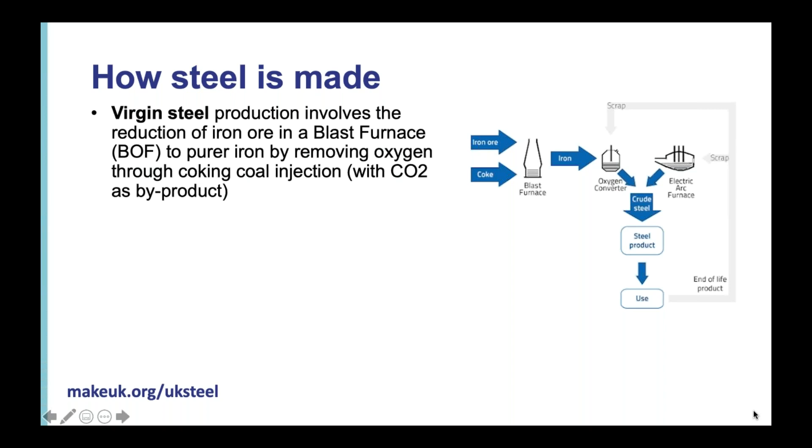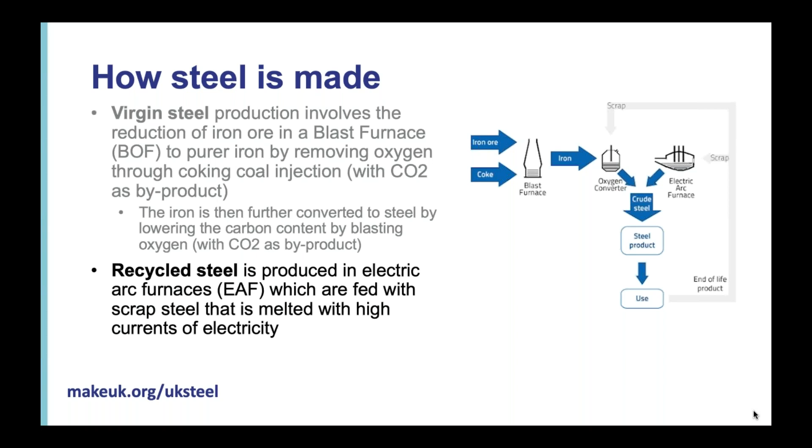The other way is through recycled steel. That is where you take scrap steel and you melt that with very high currents of electricity to produce a lower quality type of steel, but still steel production as such. On a global scale, about 70% of all steel that's produced is virgin steel, through the blast furnace process.

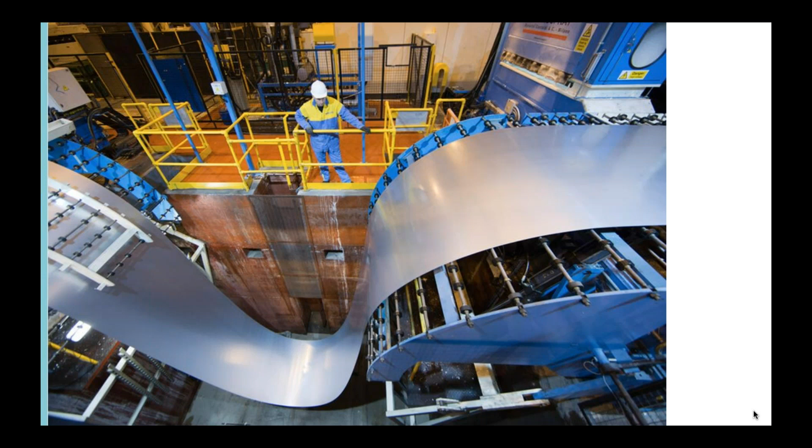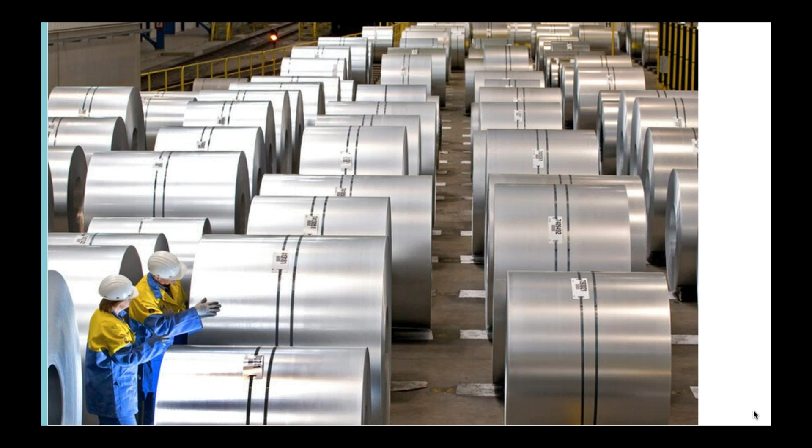I thought I'd just show you some quick pictures of what that looks like. This is first from a blast furnace site in the UK. Because they make high quality steel, they can make flat products such as the one we're seeing here. That goes into the auto industry, machinery, manufacturing and general domestic products and the like, and various high-end specialty type steels.

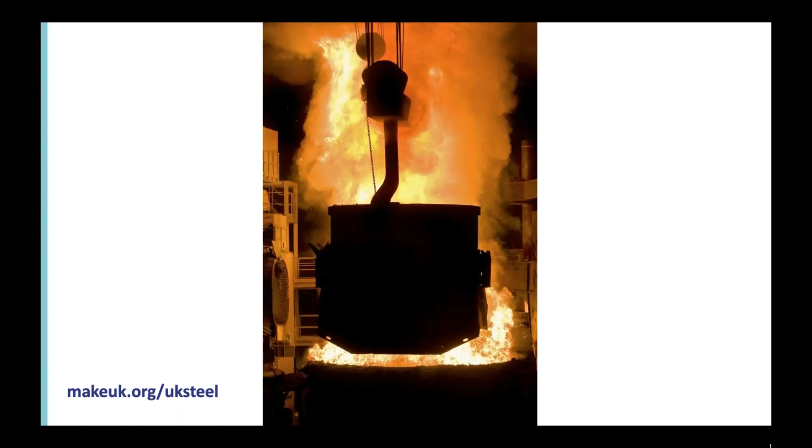The other type of steel I talked about was the electric arc furnace recycled steel, which is what you're seeing here, where scrap steel is poured in and then melted through very high electric currents. That produces what they call long products, either bars or wires, as seen here, usually used in construction or rebar as such.

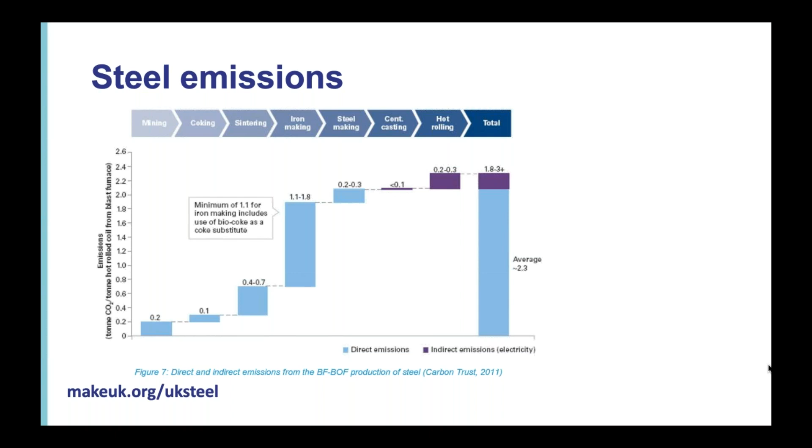Looking at the steel sector's emissions, the main emissions are from virgin steel making, where you have a lot of coal being used as a reductant. As you can see here, this illustrates where the emissions on average would come from on a virgin steel production site. And there you can see it's the iron making process. So it's about 2 tons of carbon per ton of steel that's being produced.

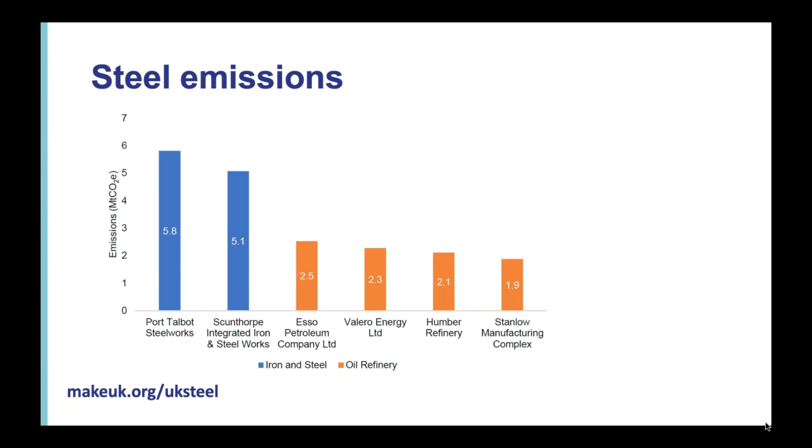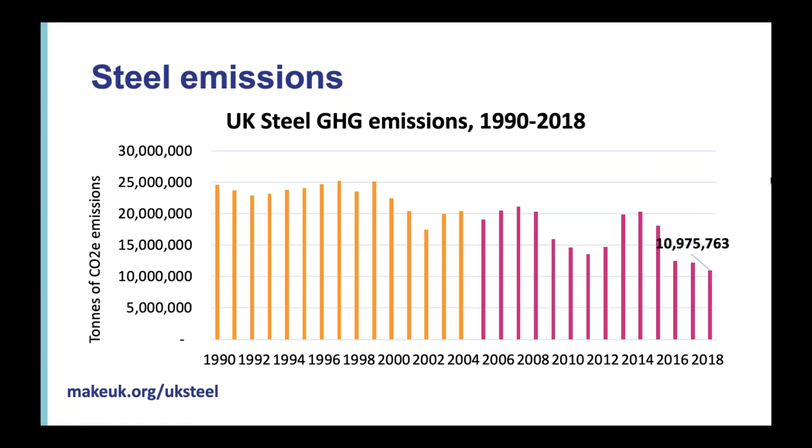We have reached a plateau in terms of how much efficiency you can gain now. As such, in the UK, we are directly responsible for almost 11 million tons of carbon last year. I also wanted to highlight some of the things that are particularly challenging for the steel sector compared to other sectors, which is that it's a very intensively traded product, very trade exposed, with globally speaking about 30 to 40% across national borders. In the UK, we import about 61% of our demand for steel and export again about half of our production as well. So again, very trade exposed.

So that means, when you look at the market for steel, we run very, very thin margins. Internationally speaking, there is intense competition, which has kept prices very low, but also margins very thin. That obviously means that any kind of additional cost you may face due to carbon pricing or various obligations from your national government is very difficult to pass on to your end consumer or your business consumer, whoever you sell your steel products to, because they are unable to. They can just choose someone else. They can buy their steel from Turkey, from Russia, Japan, and China, and so forth.

So it's very difficult to produce these low carbon steel products and sell them in the market when the product is like a commodity. Just one final point is also, as I said, at the moment there is no market really, or any niche market for green steel. From what we see, there's very few, if any, customers who are willing to pay any extra for upstream environmental qualities such as lower carbon or lower emission steels.

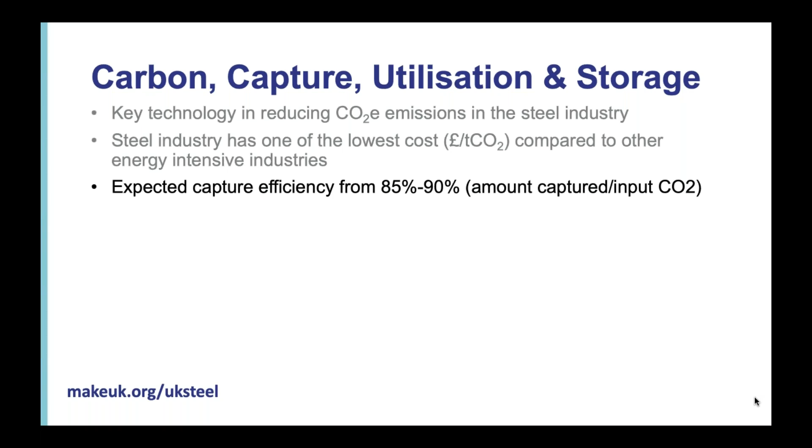At the moment, you operate with an assumption that you can capture about 85 to 90% of the site emissions. So there are some emissions you will not be able to capture with current CCUS technology. Looking at the cost, as I spoke before, it's quite low compared to other options, but you'd probably look at over £100 additional cost per ton of steel you produce, which for the cheapest type of steel would lead to a 30% increase in cost. That is quite significant when, being so trade exposed, a 30% increase in cost would make your product unsellable.

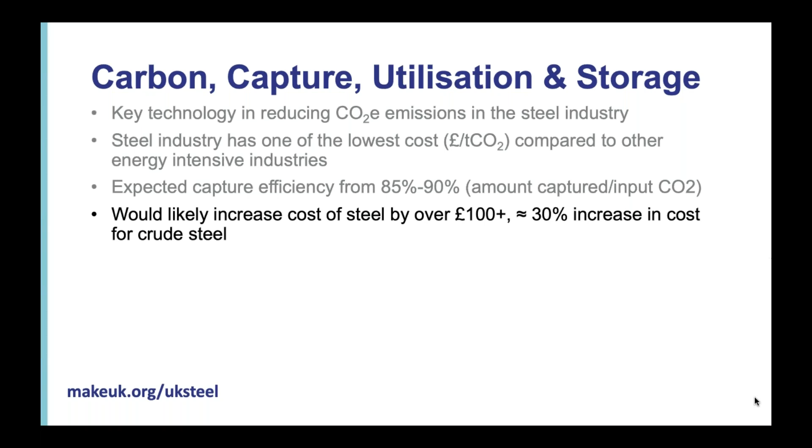I thought I'd just mention biomass very briefly, not because it is something that's actively being considered on a worldwide scale, but it is worth mentioning because there are some interesting things here. So here you're looking at replacing the coal in virgin steel making with a type of biochar.

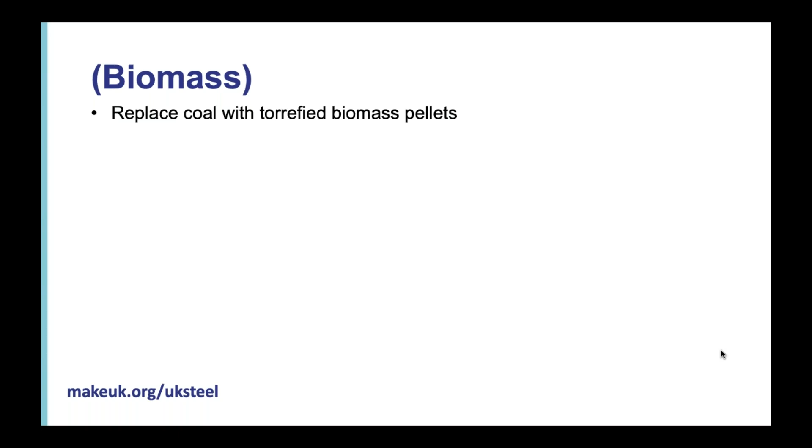It is quite an exciting option because, apart from obviously reducing carbon emissions, you also have the option, if you combine it with CCUS, of actually having negative emissions. So if part of your coal can be replaced with biomass, then there's the option, long-term wise, of going to negative emissions for the steel sector, which is desperately needed according to the UNFCCC.

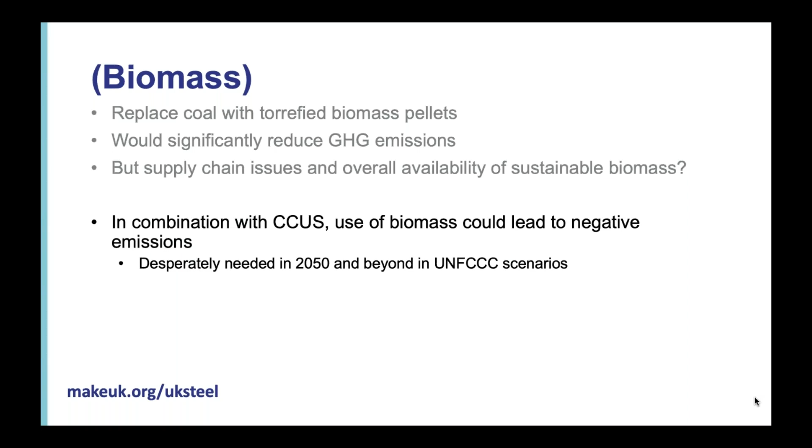But as I put it in a bullet point, there are some questions over the supply chain and overall availability of biomass on a global scale if all steel producers were to demand biomass, but that's a separate discussion. Another option for decarbonising steel production is hydrogen.

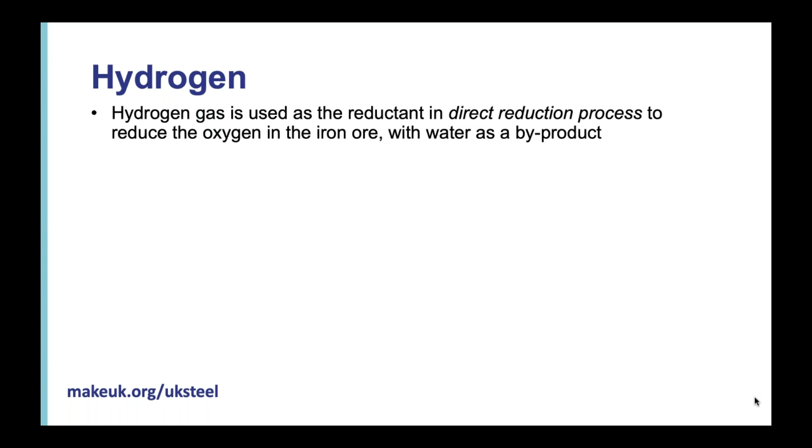When you use coal in steel production, you use it because of the carbon, and when it reacts with the oxygen in the iron ore, it draws out the oxygen, and obviously the byproduct is carbon emissions, CO2, leaving more pure iron. However, you can also use hydrogen, which goes in and connects with the oxygen, taking it out, just leaving water as a byproduct rather than carbon emissions, which is a very exciting technology.

There are a couple of steel companies around the world that are experimenting with hydrogen steelmaking. The two I wanted to mention are SSAB with their HYBRIT project in Sweden, and Salzgitter in Germany with their SALCOS scheme. It's worth mentioning that both these projects are the first looking at pure hydrogen steelmaking, but they have a timeline significantly longer than anything we've been talking about, with commercial plants fully operational in the 2030s, so quite a number of years ahead.

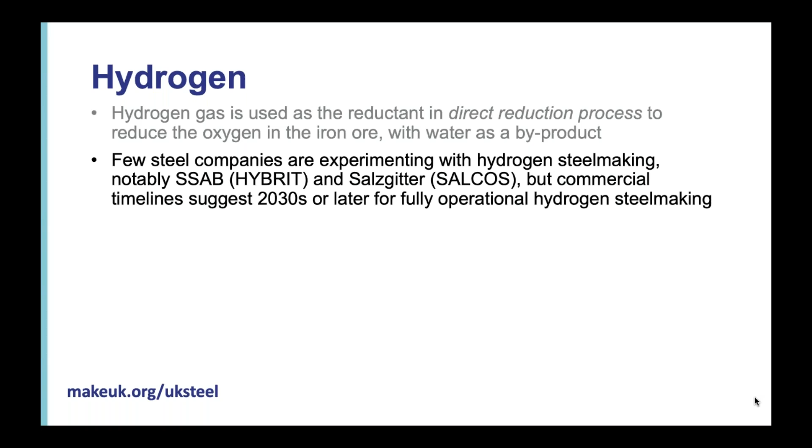Hydrogen steel production has been proven in the lab, but nowhere has a fully commercially operational steel plant been produced yet with hydrogen. In the UK setting it's also quite difficult, because we have very high industrial electricity prices. So if we were to produce the hydrogen through electrolysis, it would be very expensive. Whereas the HYBRIT plant is banking on very low cost electricity with the abundance of hydroelectricity in Sweden, especially in the north. So the cases are quite different.

Likewise, the electricity consumption itself would be significant. As an aside, if you were to convert a current blast furnace virgin steel site to a hydrogen virgin steel site, your site electricity consumption, if through just electrolysis, would increase by 16 times, so quite significant as well.

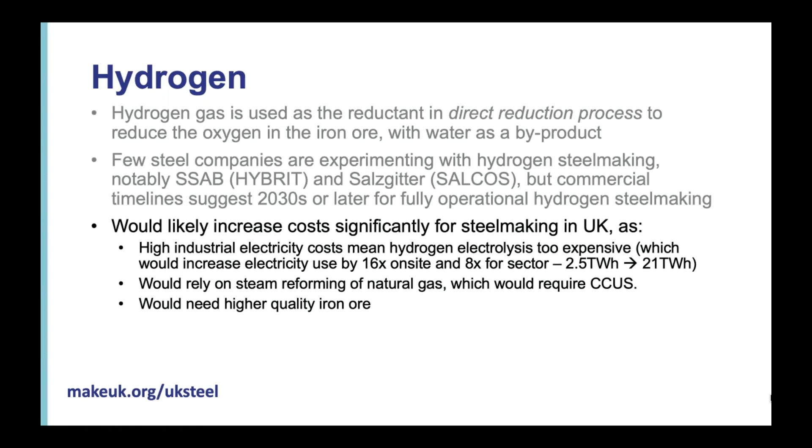So instead, if you were to do it in the UK, you'd probably rely on steam reforming of natural gas, where you split natural gas to get the hydrogen out, and that would obviously require CCUS as well. As far as I'm aware, it would also require somewhat higher quality iron ore, but that's a separate matter. So there are some challenges to hydrogen steel production. The main one is cost, and that it would probably be much more expensive compared to CCUS to decarbonize, at least at the moment.

The final option I wanted to highlight in terms of steel decarbonization is electrification. This is what we already see with the electric arc furnace, recycled steel through melting scrap, which is often mentioned as a way to decarbonize. It's not a very new technology. It's existed for over 100 years in the UK, so a very known technology.

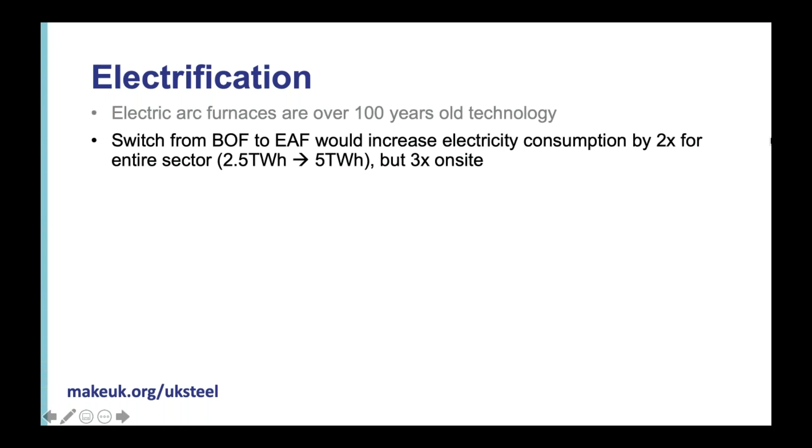Obviously, being an electric arc, you would increase your electricity consumption on the site. For the UK specifically, if you were to switch all our virgin steel over to scrap steel, you would see a doubling for the entire sector, but for the sites themselves, a tripling of the electricity consumption. So also worth keeping in mind in terms of the challenges for the sites themselves.

The reason electrification, electric arc and scrap steel is not really a long-term, or at least a short-term, option for the UK in particular is that at the moment you cannot produce all types of steel products through recycled steel. You would need too high quality and too finely combed scrap, which would be way too costly. So certain types of flat products, automotive, domestic appliances, construction and so forth, simply cannot be produced with scrap steel. So for some products at the moment, electrification is not an option.

Likewise, as I mentioned before, we have very high industrial electricity prices, so that makes it difficult to see a commercial benefit in switching over.

And it's also worth, from a global perspective, you could argue that it would make sense in the UK to switch over to electrification and start using more and more scrap because we have an abundant supply of scrap. But globally speaking, there is an increasing demand for virgin steel. There's simply not enough scrap in the market at the moment in the cycle, so therefore you would not be able to produce enough steel through electrification through the current kind of technologies, with the resource and the demand that exist.

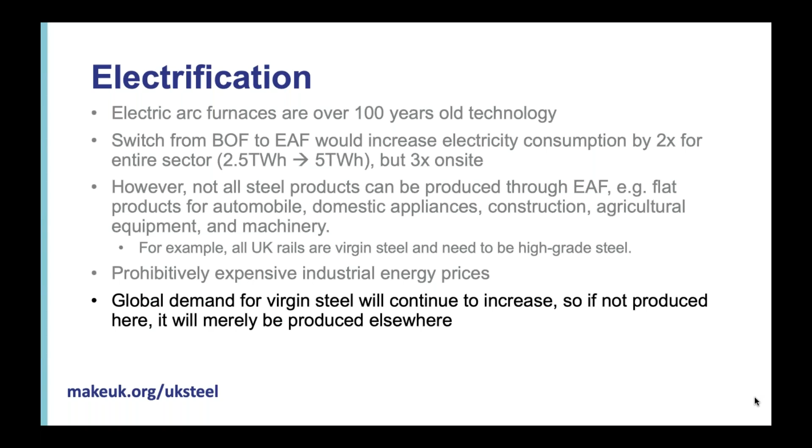So if you just electrify the UK production, you'd likely just see a switch over to having to import the flat products, with blast furnace and virgin steel production being moved elsewhere in the world, because there will be a continued global demand for this.

Finally, before ending my presentation, I wanted to highlight some of the challenges. So these are the three main options of steel decarbonization, which are CCUS, hydrogen, and electrification. And some of the challenges to integrating them and finding a route to market for them, I'm going to highlight now in the coming slides.

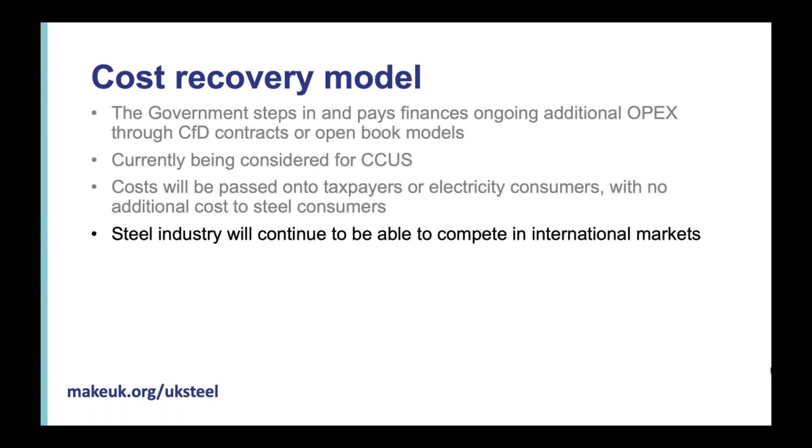That's currently being considered for CCUS in the UK, so very exciting to look at, and they're looking to either cover that through government expenditure or add it on as a levy on electricity bills, so there would be no additional cost to any steel consumers. The steel industry would then be able to compete in an international market, which is the main benefit.

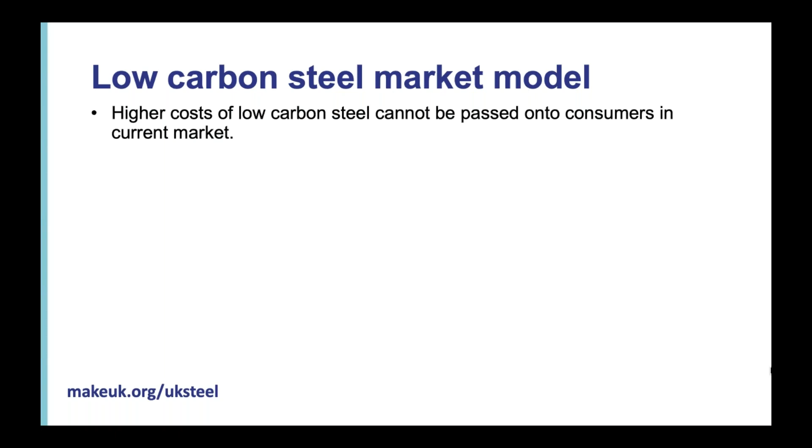The alternative is to have a low carbon steel market. This is where you say the higher costs of low carbon steel cannot be passed on to the consumers in the current market. So what do you do? You simply go in and say, we're going to use regulations or trade policies to create a low carbon steel market. The two main tools for that are carbon border mechanisms. So here you say, every time you import a steel product into the UK, as an example, if it is a very carbon intensive production, then you have to pay an additional cost, a carbon cost, when it's imported.

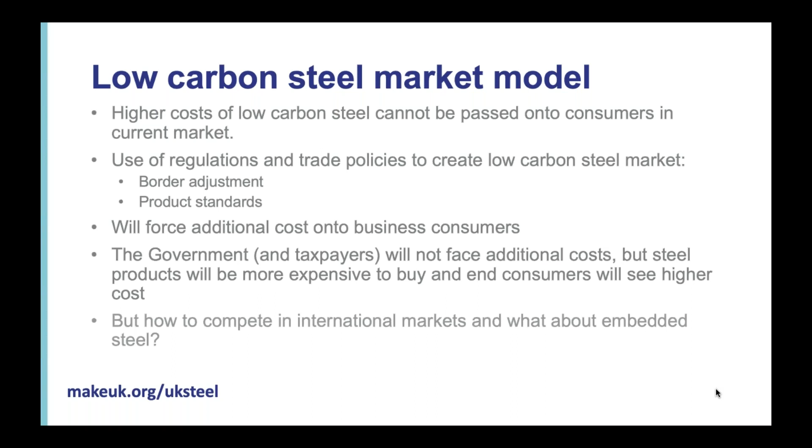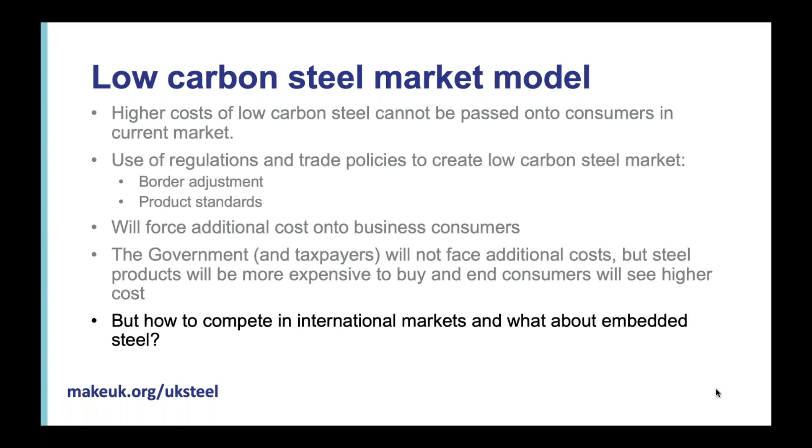The question with this model is how do you then compete in international markets, in terms of, at the moment, all steel production throughout the world, more or less, does have some kind of a form of export. So how do you address that? Will you get some kind of export support, or what's the method there?

Just a few things to highlight there. Also, obviously, you can have some form of green public procurement where the government goes in and all their steel will be low carbon. You can look at carbon taxation itself, but that is very problematic for quite a number of reasons, which I'm not going to go into now.

And then again, electricity prices is a key thing. You need to have very low electricity prices to be able to do any of these, because hydrogen, CCUS, and electrification will all see an increased demand of electricity. So from a steel perspective, as a sector, we won't be able to decarbonize without lower electricity prices.

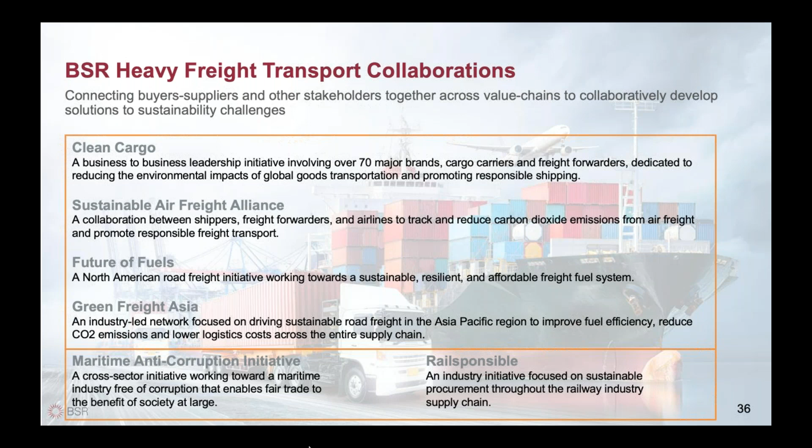So this presentation, I'll focus a bit on what's the current challenge, what we see are the opportunities, examples of how companies are working on executing against those opportunities, and then some of the key things we need to have in place to see that really accelerate, particularly on the policy side. I'm going to be leaning quite heavily on research that's been done by other people, so you'll have a lot of references in here that I would definitely recommend if you want to dig into further details.

So just addressing the elephant in the room, why we talk about this really being a hard to abate sector. The challenge is super high. It's a very complicated sector, and the decarbonisation effort is very urgent. We see demand is obviously quite significant as a share of global energy demand and global GHG emissions, and it's rapidly increasing. It's globally increasing, but it's especially concentrated in Asia.

Secondly, climate change is already having a real impact on freight movement today. Evidence last year showed that the lack of rain in the Panama Canal and the Rhine River led to unprecedented restrictions and shipping delays in raw materials production. We're also seeing that damage to infrastructure caused by climate change will have a profound effect on route planning. So as well as mitigation on decarbonisation, we also need to be thinking about adaptation and how we're building and constructing infrastructure of the future.

Thirdly, timing in this industry is super critical as well. Asset life cycles, if you think of a ship or a plane, are around 20 to 30 years. So we really need decarbonised solutions ready to sail and fly by the end of this decade if we want to have a shot at reaching our 2050 climate goals.

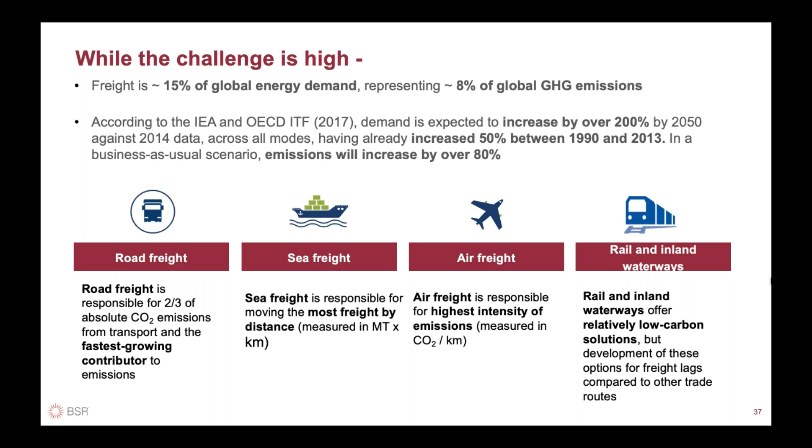Though the challenge is high, we have a lot of reason to be positive if we can align all of those variables. The transition to a zero carbon economy is achievable, and it has begun, even for hard to abate sectors, both in heavy industry and heavy duty transport. The recent Energy Transitions Commission Mission Possible report really accentuates that point, as do other decarbonisation pathways reports that have come out in the last couple of years, and a lot of what we're seeing in our work as well.

So while it's identified as hard to abate, as Reece had mentioned in the beginning, it's not impossible to abate. And we're definitely seeing signals of the potential to scale the solutions. I'm going to focus on three of these for the rest of the presentation. Firstly, when we look at the company side, we're seeing increasing cases of companies making bold commitments and reporting quite effective progress on reducing emissions.

I think freight has been under the radar for a long time, and we're really seeing its visibility now. I think that has particularly been driven by many companies setting science-based targets. Today, we have over 800 companies in the world who've committed to the Science-Based Targets Initiative. And through that work, a lot of multinationals are realizing just how much of their Scope 3 emissions are from transportation of their goods. It can sometimes be up to 30% of their Scope 3 emissions.

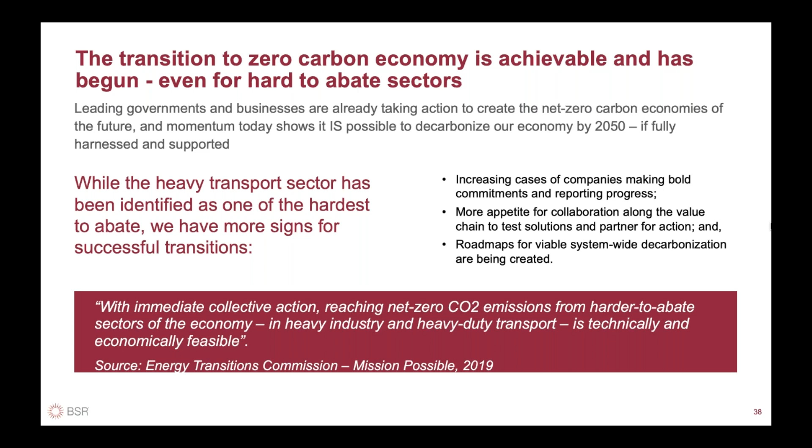This really gives us undeniable evidence that there are solutions and there are certain factors that we really need to align just to make sure that we can actually implement them. So a lot of reason to be positive, but a lot that we need to do collectively to drive that forward. Just to share a handful of examples here on those 3.

Heineken has joined the Science-Based Targets Initiative in 2019 and committed to setting science-based targets for their entire value chain in line with the Paris Accords. And in logistics, they've clearly identified the ways that they're going to do that. Firstly, by optimizing routes. Secondly, by supporting their suppliers to adopt low carbon technologies. And thirdly, by investing in innovative solutions.

And what I really like about what we're seeing from corporates setting targets now is actually explaining how they're intending to do that and really looking beyond setting those targets and enforcing them on their suppliers, actually co-creating some of the solutions that they need to see.

And then lastly, you see from forwarders like DHL. DHL's been a real leader in this space, but they've also articulated very clearly, so they want to improve carbon efficiency by 50%, but also do things like ensure that they continue to help their customers design environmentally friendly supply chains. So they want to have more than 50% of their sales to incorporate green solutions.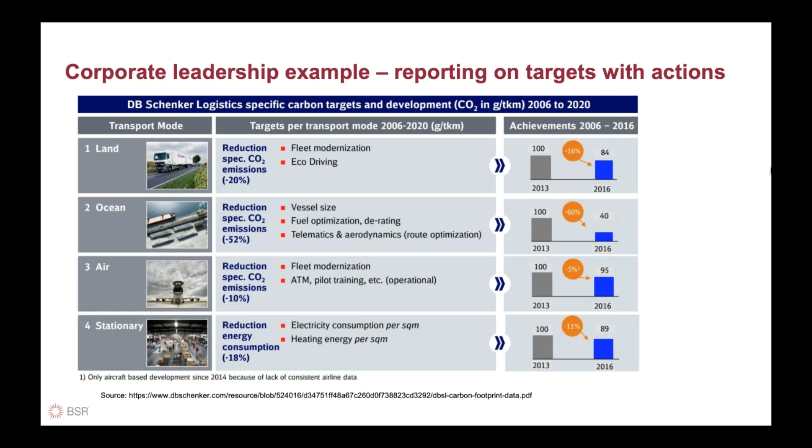I think this is really helpful also to make sure that other companies are aware of tried and tested solutions, and that we see some best practice sharing of how these things have been implemented and how they can be replicated. It also signals definitely to innovators out there who can help partner and collaborate with these companies on driving more emissions reductions through these types of signals.

And I raise this just to show that it's not the companies just making it up, of course. There is a really good set of levers that have already been identified through a number of different research reports. I really like the way this one's articulated. This is by Professor Alan McKinnon, and it's been widely cited. The key message is that we need to have a toolbox of options.

Just doing energy efficiency or demand management or modal shift is not necessarily going to be the main answer, but we need to blend them as far as possible, and some will be more relevant for some modes than others. Energy efficiency continues to be really critical.

Obviously, it is one of the easier ones as well, in a sense, because it often has very positive returns on investment, given fuel costs are about a third of operating costs for trucking, for example. And energy efficiency in certain modes also has a very significant impact. So up to 40% in shipping, up to 55% in aviation.

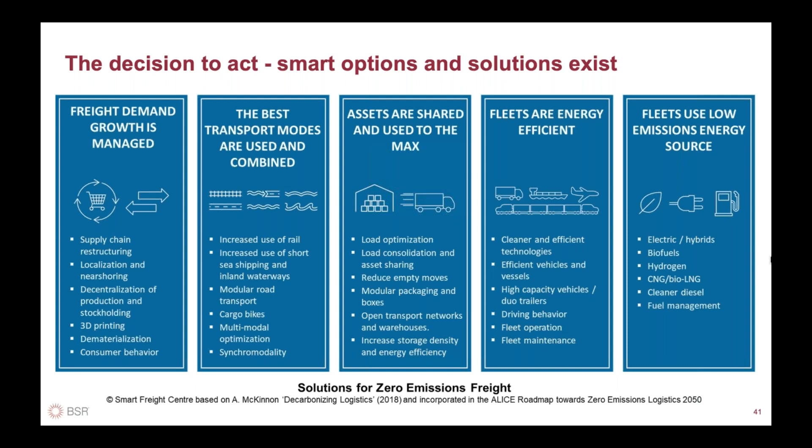The other key area really is about demand management. So shippers, the cargo owners, have a big role to play in this, really thinking about localizing, thinking about supply chain restructuring, etc. We see demand itself shooting up in the future, and we need to think about how we can empower people to reduce that as well. And then the decarbonisation technologies, some of those highlighted here, are really going to be segment specific.

Just some other examples that you can look at after through these slides, but just to accentuate the point of how those levers can really deliver real performance improvements in a short space of time. You can see that modal shift where possible, so moving to rail shipments, has really significant impact reduction of the CO2 emissions from IKEA. And some other ways of being quite smart about demand management and fleet efficiency are really

delivering solutions and reductions. It's also relevant to know that a lot of these kind of case studies and examples exist now. So this is from the Smart Freight Centre. BSR also has a catalogue of examples that you can reference through the Future of Fuels initiative. It's worth getting in touch to just learn more about what others are doing so that you can really operationalise this quickly.

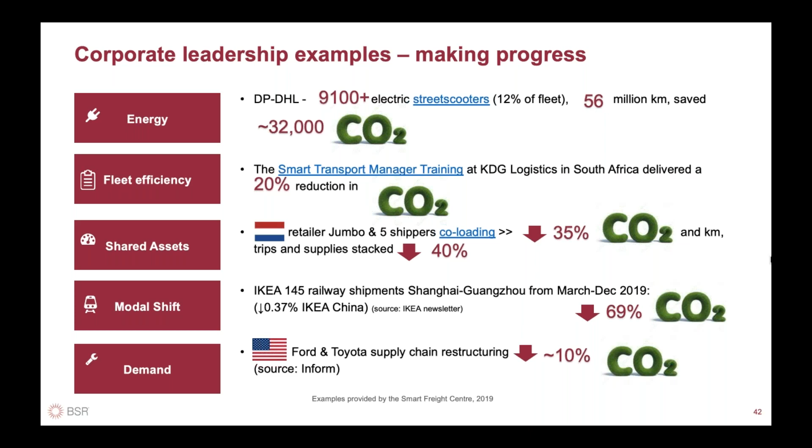Just move on quickly to then when we talk about what we mean about increased appetite and opportunity for collaborative partnerships. So we've mentioned a lot that obviously the shipping or trucking and aviation industry cannot do this alone. There needs to be real value chain collaboration. Last year, we saw a big increase in that sort of work.

Obviously, there are companies that have been involved in collaborative initiatives like the Clean Cargo Working Group that we run for several years. But we've also seen a lot of interesting sort of bilateral or multilateral value chain experiments and decarbonisation pilot projects. So last year in shipping, we saw some biofuels pilots between Maersk and a group of Dutch shippers through the Dutch Sustainable Growth Coalition, and IKEA and CMA CGM did a similar kind of biofuels pilot.

And these sorts of pilots really help to identify operational successes or what needs to be changed in the biofuels blend. Also, the way that you set up the types of contracts to have that work through different companies working together. We're seeing similar things in aviation, often with the airlines and then infrastructure. So how can they be working with airports and energy providers to really help to scale sustainable aviation fuels? And then we're seeing different sorts of coalitions that are coming together that bring groups of stakeholders to really think about how can we help and collaborate to look at identifying zero emission vehicles of the future.

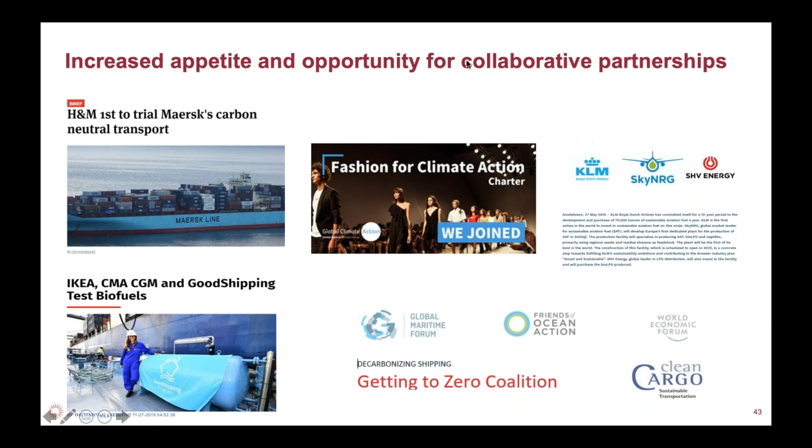I'm very conscious of time. I've just got a couple more slides here to get through. So just two more things.

So first, on the decarbonisation pathways, as I mentioned, that's another thing that we're really seeing, really good, well articulated and clear decarbonisation pathway plans through a number of different research reports. First, Mission Possible, Lloyd's Register has also done the same, and the OECD ITF as well. So this is an example of how the Energy Transitions Commission have laid it out for trucking.

We're looking through demand management, energy efficiency, and decarbonisation technologies, how much impact that can have, and the sort of timescale where there's transition fuels versus longer term solutions. Also identifies where there's a need to drive different levers to operationalize these improvements.

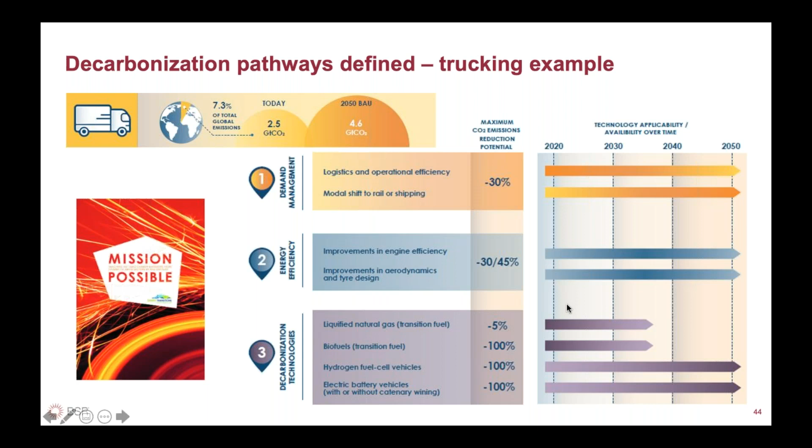Sorry, I'm again having trouble moving the slide.

A couple of things on decarbonisation in shipping examples. So other reports have identified where savings can be made from an operational, technological and fuels perspective. This is obviously different compared if you're looking at a container ship to a breakbulk vessel, etc. They all need to be tried and tested with more pilot projects, and so we can look at scale and bringing down costs.

I just want to highlight one thing which I think is very important, that when we look at technological solutions, that's one aspect, but we also need to look at what's happening on the business decision-making side and the demand management. So if we do see changing trade patterns in the future that moves towards more regional trade, this could imply that short voyages could increase, and that could help on the decarbonisation journey as well. Therefore, innovators should start thinking about how can we really invest and improve battery design for those sort of short sea vessels.

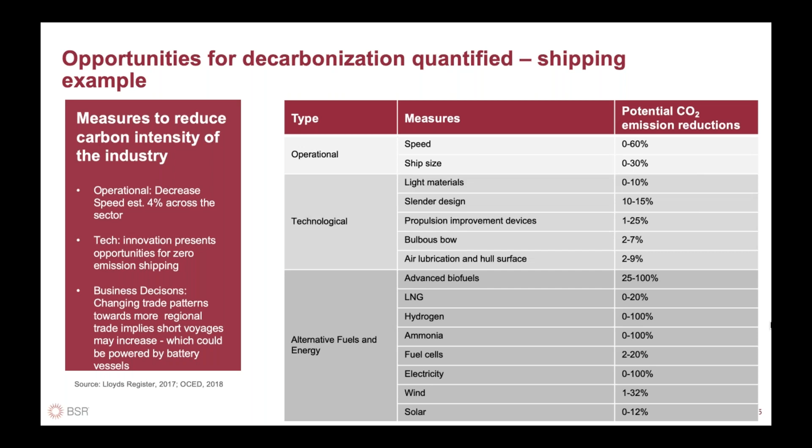Lastly, a couple of points here. So just to say, I think how we need to move forward. So we need more scalable system-wide action. Bold policies, bold climate policies will drive business action and create reinforcing ambition loops. And all stakeholders have a role to play in this.

I've got a lot of things to say about this, but I know that I'm running out of time.

So really, this makes us look at three things. So companies have to develop strategies for efficiency, modal shift and acceleration of the development, deployment of low carbon fuels and vehicles, and that really will entail new partnerships with government and civil society, industry, peers and customers. But every actor in the value chain has a critical role to play in the demand levers, but also setting the policy environment and financial incentives in the right place.

On the left-hand side, I've highlighted some of those key actions that we see, and happy to go into detail about those another time. But the setting of ambitious, clear emission reduction goals from governments and authorities is going to be really critical to drive the type of focus that we need. But supporting those targets with a comprehensive set of policy measures and aligning them with financial incentives is also critical.

So supporting research on zero emission vessel technologies, regulations about how to shift to low carbon fuels, enforcing energy efficiency standards in vehicles, pricing carbon, etc., is also critical. And then further, the industry themselves and industry collaborations really need to create more demand for products and services that have a green offering. And this is our role to see that articulated and make sure it's visible for others to be able to replicate.

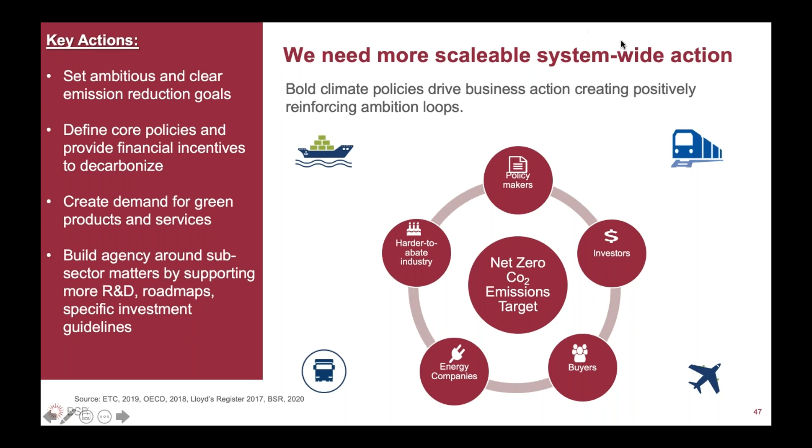Last point I just wanted to make here is that there's no need to reinvent the wheel if you're a company or a country looking at how to get involved in decarbonising transportation. There are several initiatives. Again, I just need to move the slide to the last slide here. There are several initiatives that are in place already and several organizations that are there to support you in implementing some of the ideas that I've shared today, and making sure that we get the collaboration that we need to look at the policy and financial frameworks that we need to make that work. I'll leave it there. I understand with time constraints.

Hi, Angie. Thank you so much for that presentation. And yeah, sorry about the slight technicals there. I think sometimes I was moving your slides and sometimes you were. Look, I know from speaking to you for the last couple of weeks, Angie, that you could have talked about this for a very long time. And with you, Frank, and we do indeed have a lot of questions coming in. However, we do only have a couple of minutes left. So Frank, I'm going to bring you back in. Can you hear me? Yes, I should be able to hear you now. Fantastic. And Angie, you still on the line? I am. Fantastic. So there's a couple of questions that I'm going to try and put together and ask the both of you.

So I think between heavy transport, and particularly shipping in this case, and indeed heavy industry in this case study that we had today, the UK steel industry, there seem to be two things. One thing that is very reliant on a whole systems energy transition, which seems to be quite evident across the two. But secondly, there seem to be technological solutions there today that offer tangible solutions that we can enact today, like CCS and biogas. I think were the two that stood out for me that crossed over into the two industries. Frank, I'll start with you. What's the greatest challenge in making these competitive or making these attractive to organisations, and what do we need to do to make that happen?